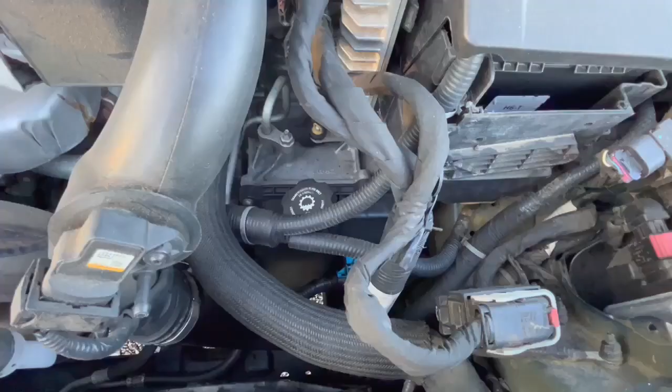Under the hood you can see that we're dealing with a 6-speed automatic transmission. I am going to pull the stick out and check the fluid level. We're going to wipe this stick off. We're going to check the level again, but it looks good so far. Fluid level is good. So now we're going to take it down the road and see if we can duplicate the problem so we can find out what's going on with this Buick Regal.

What I want to do is watch the RPMs when I'm going up the hill and this is acting up. We just want to make sure that we are dealing with a transmission slipping. And let me show you. So the car is shaking right now. I don't know if you can see it in the steering, but the RPMs weren't going up.

So anytime that you see the RPMs not moving and you think the vehicle is slipping, it usually comes back to be a misfire. So I have another video or two on YouTube about misfires being misdiagnosed as transmission issues, and that's what we've got going on here. We have a misfire. I'm going to hook the scan tool up to it. We're going to take a look at the data to see if we can see this misfire, and let's do that real quick.

Okay, so I got the scan tool hooked up and we are going to go to control unit.

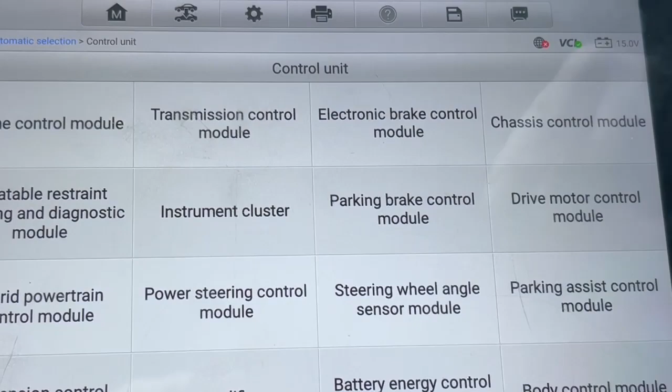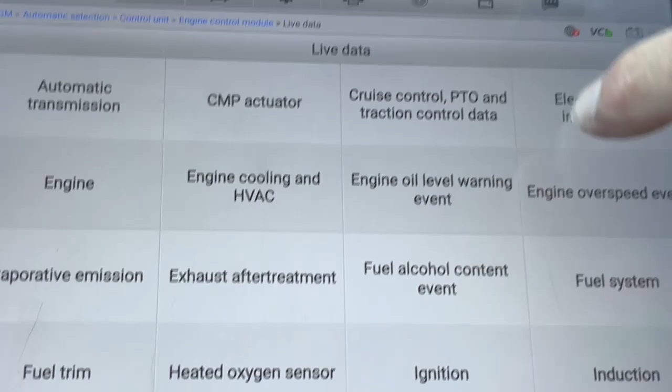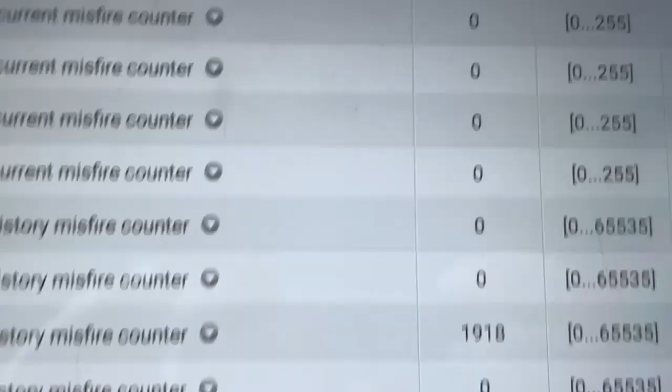We're going to go to engine control module, and what we're wanting to look at is the live data. Let this come up, scroll through here till you see misfire, go to misfire. That's the data I want to look at, because look, already you can see on cylinder 3 the misfire history is 1918. So what we're going to do is we're going to watch cylinder 3 as we're going down the road and see if cylinder 3 is misfiring when we're getting those actions.

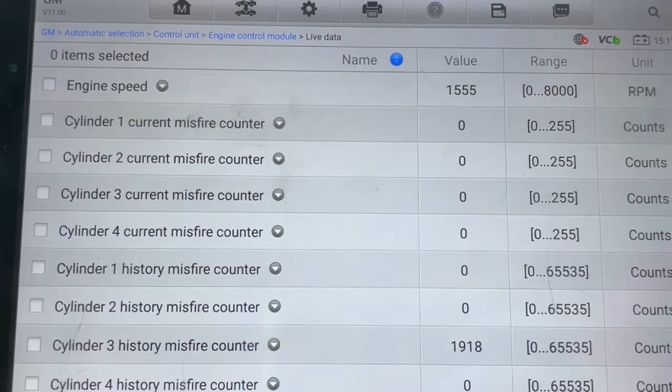And I've got a little grade. I'm going to take this car up and we are going to see if cylinder 3 is the misfire that I'm feeling and not a slip in the transmission. So let's take the vehicle up the road here. Okay, so there it acted up a little bit. I'm going to try to just kind of creep up on this grade a little. Yeah, now there's the problem. Yep, cylinder 3 is missing badly whenever we get in.

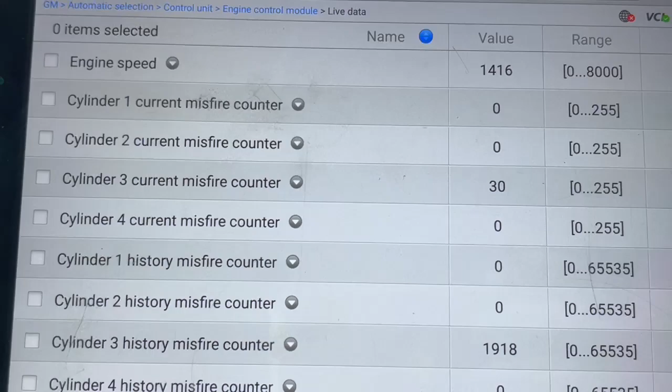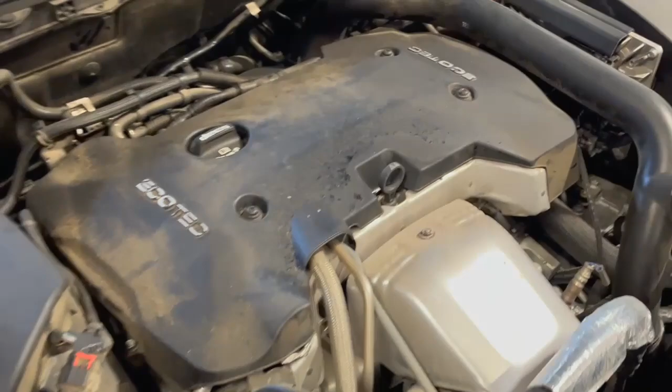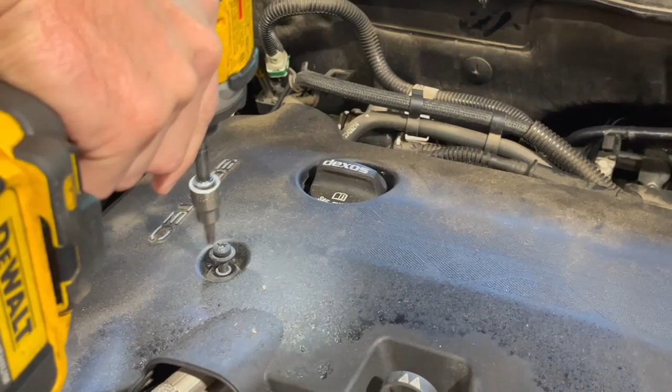So what I'm going to do is concentrate on the coil and the plug. We're going to put a coil and a plug in it, and we're going to see if that takes care of that misfire. All right, so Cody's got the hood up on it, and we're going to get up underneath this cover, find that number 3 cylinder, and get that coil and plug replaced. What size is that? Torx 30. Looks like they've already replaced one coil right there. All right, cylinder 3.

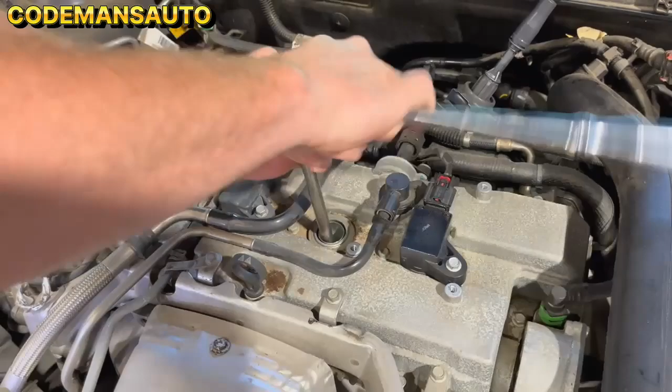We're changing the coil and the plug, but we're only changing it on cylinder 3. Now I know a lot of you guys are going to comment and say, why don't you just do a complete tune-up? And that's not the way it works here at my shop. Whenever I find a problem, I fix that problem, and then if they want to take it somewhere and have a tune-up, that is fine. But they brought it to me to diagnose, to tell them whether or not it was the transmission, and that's what I'm doing. I'm going to show them that it's not the transmission.

But anyway, we don't work on engines. We are a transmission shop. If you see us working on an engine, it is because someone thought that they had a transmission issue and they brought it to us and found out that it was an engine issue instead of a transmission issue.

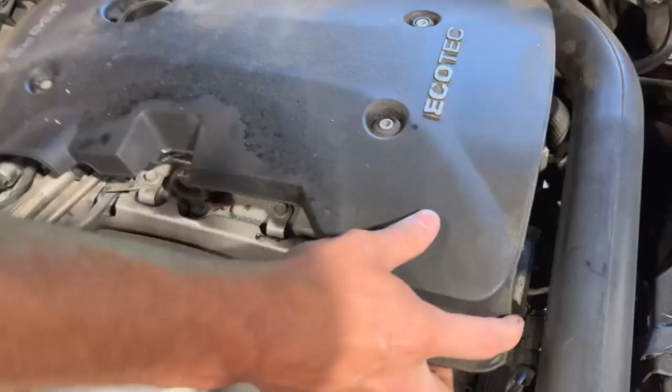So we about got this coil on there. About got the plug in it. You see how easy it is. It's a real simple job and shouldn't take very long, maybe about 10-15 minutes. The hardest part is finding someone with a scan tool that can diagnose your vehicle the way we did, and that's why it's good to have a good scan tool, because it saves people money and it saves us a lot of time trying to diagnose this by changing all the coils and the plugs. We're able to change that one, and we can save the customer money.

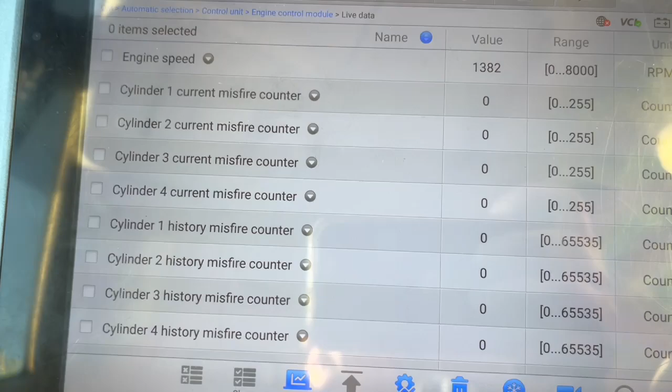All right, Cody's going to finish buttoning this up, and we're going to get in the vehicle, take it down the road, and see if that took care of our cylinder 3 misfire. I've been driving it for a few minutes just to make sure that it took care of the problem, and it did. We're going to take it up the same grade that we went up earlier in the video and see if it misfires. It has misfired on that grade ever since the car has gotten to me, and it should do it again if it's going to misfire.

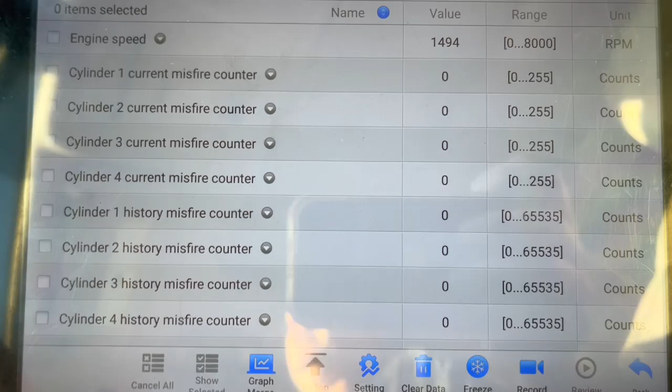I think we took care of the problem with the coil and the spark plug, and I think the customer would be happy. I did call the customer, tell him what I was doing. He was okay with that. He said that was fine, and that he might get the tune-up done after I get done with the vehicle. But anyway, what I'm going to do is go up this same grade that I went up earlier where I had all the misfires, and we'll see what it does.

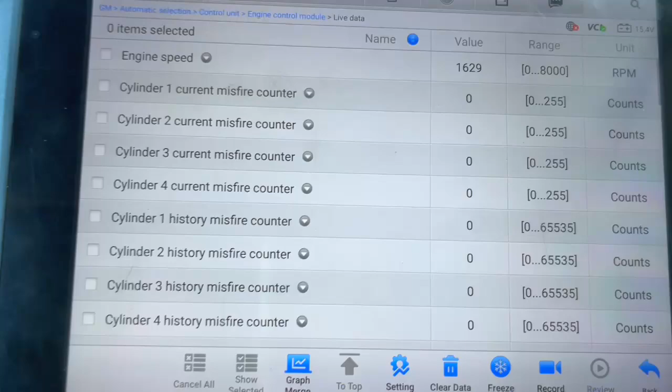So this is the grade that I was going up earlier, and the car is running really strong, and we're just going to ride up through here a little piece, and let's go back down and look at the data. And as you can see, I have no misfire history. I have no misfire. We saved this guy some money. I'm happy about this situation. I'm glad that it was not the transmission, and I'm glad to be able to give him his car back.